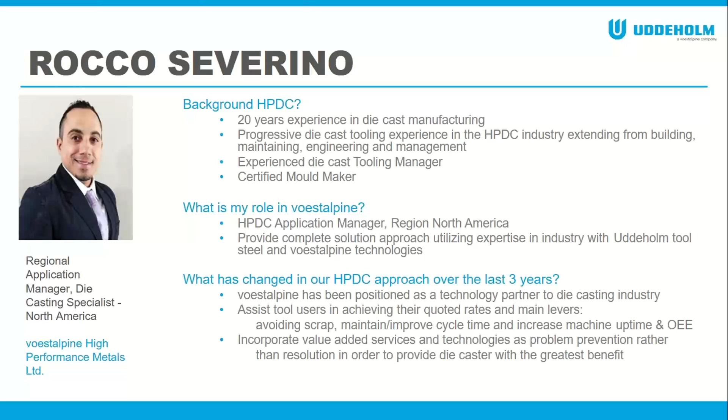Thank you, Ulf, much appreciated. And once again, welcome everyone to today's webinar on the Uddeholm high pressure die casting concept, also known as the voestalpine high performance solution. Hopefully you'll be able to take what you see here today and apply it in your daily business with any improvements that you may require. So with that, we'll get started.

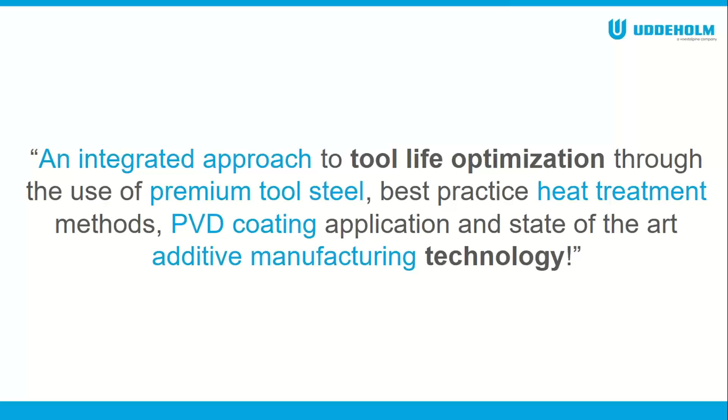What is the Uddeholm high performance solution? It is an integrated approach to tool life optimization through the use of premium tool steel, best practice heat treatment methods, PVD coating application, and additive manufacturing technology.

A little history before we move forward. Uddeholm tool steel, as you may know, is more than 350 years old. It remained that way for quite some time before realizing that tool steel is only as good as its heat treatment. This is where Thermo-Tech heat treatment was born, located in Ontario, Canada. If you've joined the other webinars by our colleagues, you would have had some insight into what Thermo-Tech can offer.

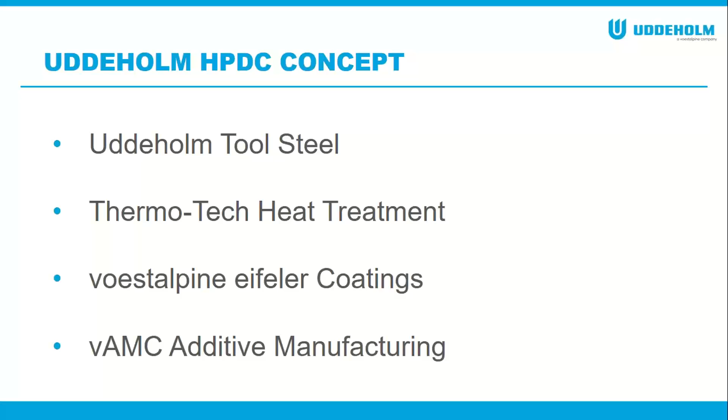It remained this way for many decades, but for the die casting industry, that alone is not enough. Tool steel cannot resolve all issues. Due to that, this is where voestalpine eifeler Coatings was born. This was purchased and added to the portfolio in order to lift the tooling performance and tackle multiple issues at the same time. Then last but not least, you have VAMC, the Additive Manufacturing Center, which complements the other technologies in the system. So what is the system exactly?

It's promoted as a complete solution. By complete solution, we mean being able to mitigate or resolve multiple issues at the same time by using various applications and technologies. This system is comprised of starting with a premium tool steel such as Dievar.

Now the latest Dievar quality standards can meet a minimum of 18.4 foot-pounds of impact toughness. The NADCA requirement, or minimum standard, is 8 foot-pounds. So you can see it's double the NADCA standards, and it really is in a class of its own. For a foundation in your tooling, it is a perfect option. We'll see some case studies further on where we utilize Dievar and PVD coatings as well.

So you couple that with best practice heat treatment, obviously to get the most out of your investment. You want to optimize mechanical and thermal properties of your tool steel.

This is typically left up to the tool maker. So if you're not following through and ensuring that a tool steel like Dievar is heat treated the way it should be, then you could have issues down the line. Dievar, for example, cannot be heat treated like your typical premium H13. It has its own recipe. It should be treated as such.

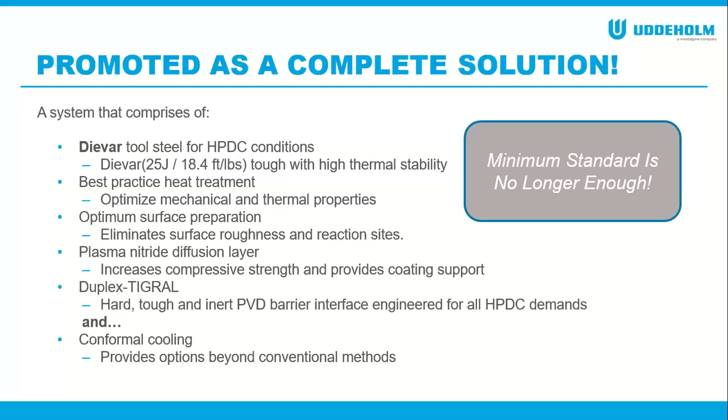Why is this necessary? The die casting landscape is changing, and it keeps evolving, rapidly moving towards stricter quality requirements. Quality has always been a key focus for die casting, but even more so now. More aggressive alloys take a toll on your tooling, resulting in increased heat checking, shorter overall die life, and inefficiencies that are difficult to deal with. So thinking that you could remain with premium H13 and stress tempering—that will no longer be enough in today's die casting.

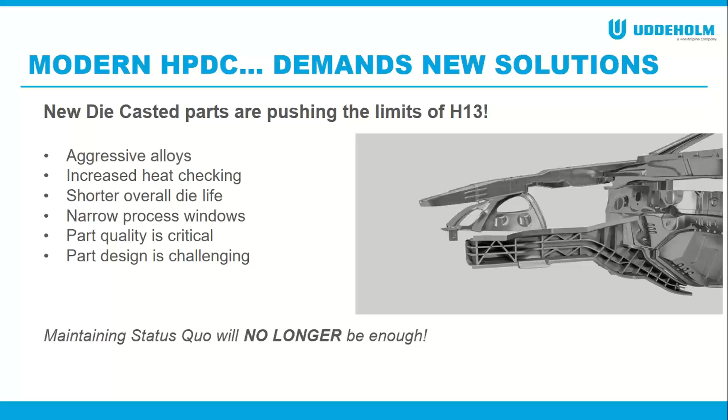So what do these demands mean for a die caster? The part quality challenges faced in die casting on a day-to-day basis are way more than the six shown on this page, for example. But for the six highlighted here, we have either a product or technology that can positively influence any one of these. And it's important to state that with voestalpine alone, you can tackle any one of these issues.

Now we look at the first one, soldering, for example. For the most part, it is difficult to get away from—that's the chemical attack of the aluminum on the die steel, wanting to pull the iron out of the tool steel. So it's unavoidable for the most part.

So when there is soldering, what typically happens in a die casting plant, for those that still use die lube lubricant? You typically want to overspray the tool. So trying to resolve soldering, in turn, you're accelerating heat checking. Now you've made an investment in a premium tool steel such as Dievar, and trying to resolve soldering, you're deteriorating your investment and accelerating heat checking. This is why it's important to have a combination—a combination of Dievar and Duplex-TIGRAL will allow you to reduce your spray, get the most out of your tool steel, and resolve two issues with that combination.

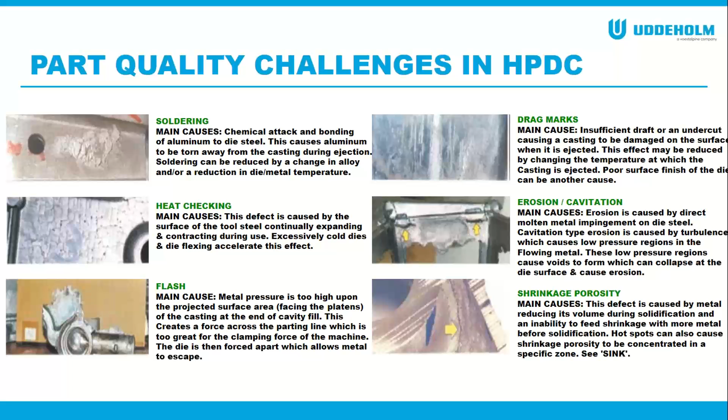So all of the part quality challenges, what does that mean? It results in repetitive failures in the die cast machine, so inefficiencies and start and stoppages of your die cast tool and your die cast cell.

In this example, you see die cast machine number 4. There have been 44 stoppages over a 1-week period. So some of you may think, well, 44 stoppages, I've seen a lot worse than that. But when you think about it, every time the die cast machine starts and stops, and you need to start up again, typically a die caster will scrap 3, 5, 7 or more castings on startup, all depending on the product and the size of the tool, before being able to make production ready parts.

So the downtime now, in turn, promotes a quality problem. So once again, one issue creating another. If you roll that cost over the course of a year, you're looking at millions of dollars just in startup scrap alone, not to mention the toll it's taken on your tooling and or your cell.

So premium tool steel, proper heat treatment, PVD coating, and of course conformal cooling, which is often overlooked, all provide significant opportunity for productivity improvement.

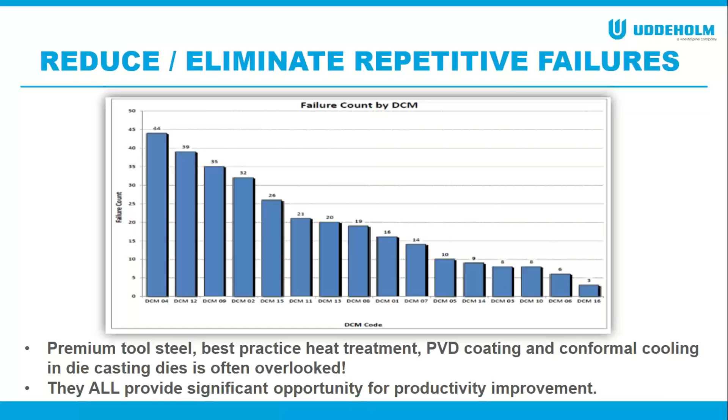So repetitive failures, now you know which die cast machines are the worst offenders, but you cannot resolve that. You do not know the reasons for failure, so you cannot determine root cause and corrective action. So you need to understand that first and foremost.

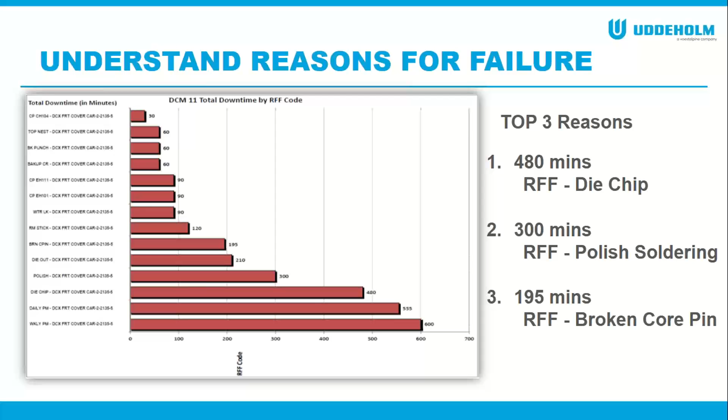So your top three, you now understand and you know, so you can determine the root cause and apply the appropriate corrective action. So now that we know that, tackle one of them: broken core pins.

This is usually the low-hanging fruit for a die caster, relatively low cost, and typically easy to change depending on the design, if quick change designs were added to the tooling.

So in this example, we have an H13 core at 44-46, which typically would need replacement every 4 days. And you can see from the picture, heavy soldering, erosion, and excessive downtime associated with that. So this creates your repetitive failure, your up and down situation, and your unscheduled downtime.

By applying proper surface finish to the core pins and the duplex Tigral PVD, the life was tripled. And what that does, it now allows you to schedule replacement during scheduled time, for example a weekly PM. So now your die cast machine is running when it needs to run, and you're performing maintenance on scheduled time, so you're not affecting your OEE. So this is a perfect start.

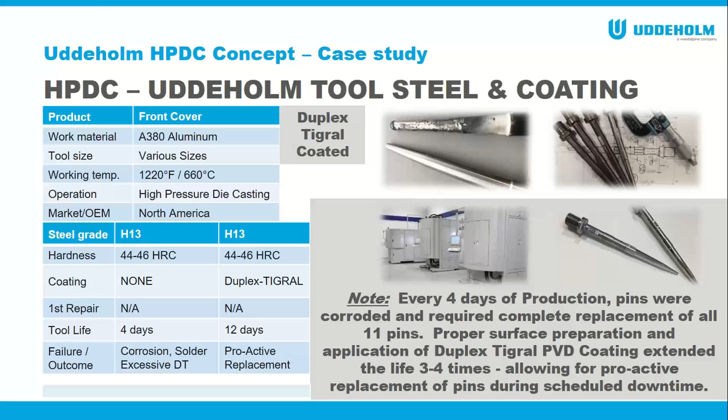So now once you have core pins and you've tried that and you have success, naturally you go on to slightly larger inserts. In this example, we have a gasket groove insert for a front cover tool. You see a little racetrack feature on that tool, as we call it. That is the gasket groove, or creates the gasket groove seal on the front cover, the RTV seal.

This here, and it's important to note, was already converted to Dievar at this point. So the trials were done, the benefits of Dievar were realized. So this insert was no longer being made out of H13, it was made out of Dievar, but now we still have breakage at some section of the groove, on average every 8,000 parts. So you may say, well, we have Dievar, why are we still having breakage?

Back to my point that the tool steel does not resolve every issue. And the moment you tell yourself that and you understand that, then you're not expecting the tool steel to do something that it cannot. So here we then apply, again, the proper surface preparation and a duplex Tigral PVD coating.

And this tool reached 62,000 shots. And I can safely say from past experience, each insert thereafter with this system would last in the range of 50 to 60,000 shots. So it wasn't a one-off.

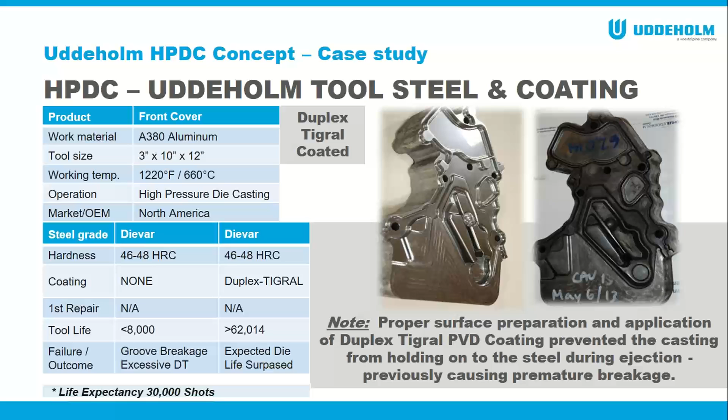During die opening, it would want to pull away and eventually break the section over a certain amount of cycles. Being able to release off the cover half helped tremendously in this case. You still need the substrate to be a premium steel like Dievar to make sure you can last 62,000 cycles and not have a heat checking concern. You may resolve the breakage, but the last thing you want is heat checking in a groove, which is also unacceptable. You see the insert on the right here, which is still in the Ontario, Canada office on display.

So if it works for sub-inserts, why not work for main cavities? Naturally, this was the test and this was the natural progression. Here you have the same front cover tool, but it is the ejector half, opposite of that gasket groove insert that we just reviewed.

Because the larger inserts, and everything is about cost, you have to go through the proper DOE and make one change at a time. Here the main inserts were still Orvar superior at 44-46 with the stress tempering, and they would require repair at 28,000 shots roughly. It was absolutely necessary to repair at that point because of the heat checking, soldering, erosion. At the end of the day, the quality of the castings was not maintained, so you have to swap tools and start fresh. At 28,000 shots, this tool was pulled.

You see a tool life reached of approximately 132,000 shots. There's an asterisk there because you can reach a certain life, barring no catastrophic failure, but how much money and time do you want to invest to reach that life? In this case, to reach 132,000, there was excessive downtime, scrap castings, and repair and maintenance costs associated with that. The overall quoted die life was not even reached. So you can imagine, if that money was invested up front, it would be better served.

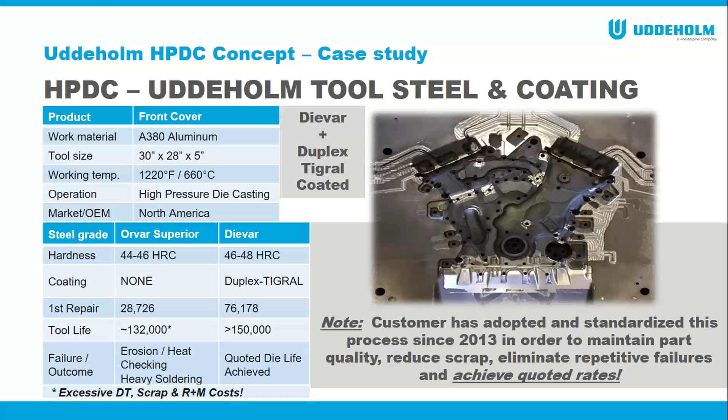So the final complement to the system, conformal cooling. Here we have a different product, not the front cover product — it's a clutch housing, in this case a multi-plate tool center fill. With a clutch housing, if you're familiar with this product, you have thin wall sections, just the nature of the design, and right in the center you're dealing with a thick section. So you need to feed that thick section, but with any thick section in a casting, you also need proper cooling in order to have the right solidification time. So that becomes very challenging.

In this example, with a premium H13 sprue, which fills the casting, at 44-46 Rockwell with the duplex Tigral coating — again, I'm showing you examples that you need the right solution for the problem. There was still heavy soldering and, of course, shrinkage porosity at the gate where the sprue and spreader meet, at the last area to solidify.

With that shrinkage porosity, the scrap was well over 20%, at one time close to 30%. You could just imagine having to backfill and remake those castings, and the whole headache all the way down the line. Tool life was respectable, but tool life is irrelevant if you're not making good castings.

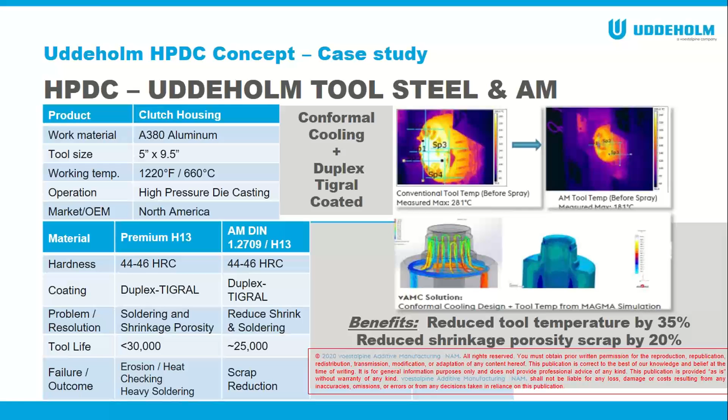FEA analysis needs to be performed. Do you have the cooling in the right place? So on and so forth. This was a tremendous improvement and a nice complement to the system.

So now back to a die casting plant and scheduling. A tooling engineer or tooling supervisor manager needs to schedule preventative maintenance. With your basic tooling, let's call it your premium H13 and stress tempering, a typical service regimen would be every 20 to 30,000 shots.

Every tool is different depending on the product and the size of the tool. The maintenance schedule for a transmission case will be different than one of a front cover, as this example shows. But let's just say for this it's every 20 to 30,000 shots, and it's absolutely necessary to have a rotation at that interval.

Excessive heat checking, frequent polishing, welding, and the biggest waste of all, extra operator rework. You quote a die cast machine to run with one operator, and now you need to add a body just to bring castings into specification. That is huge waste, and usually the last straw before having a die pulled for another one.

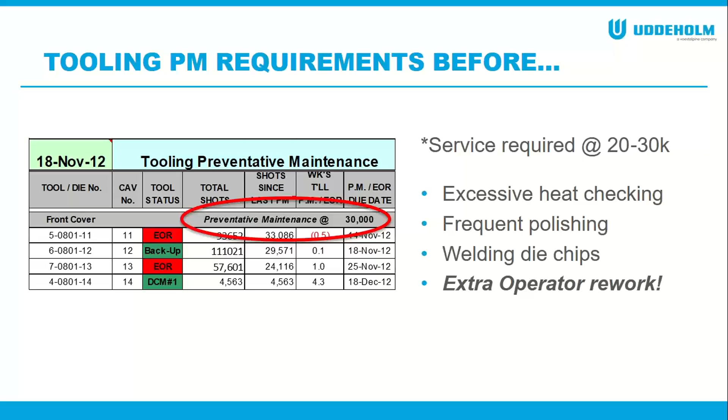With our system, or with the Uddeholm system, you can safely extend that interval to 60,000 shots. You saw that one case study was beyond 60,000, but you also want to have a schedule that allows you to make a change before going beyond. So 60,000 is a safe number, and with that you are skipping one service essentially.

So not only the money saved with one service, but everything associated with that, the schedule, the setup time, the scheduling, the rotation, having more dies ready in order to rotate. The savings goes beyond just the maintenance interval or the maintenance cost.

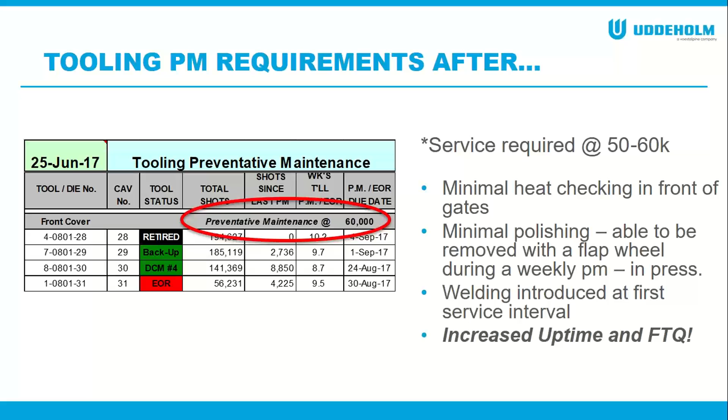With this, you have minimal heat checking in front of the gates, minimal polishing, which can be addressed during a weekly PM with just a flap wheel. You have the PVD film protecting that die steel, which allows the soldering, if there is any, to be easily removed. Welding is introduced at the first service interval. And at the end of the day, increased uptime and first-time quality for you, the die caster.

All of this translates into an improvement in overall equipment effectiveness, OEE, as everyone calls it in the plant on a day-to-day basis. Many meetings around just OEE in general. So what is the calculation for OEE? You have availability times performance times quality. This is the calculation to get your overall equipment effectiveness and understand it.

So what is availability? If you're scheduled to run 24 hours, the thought is that you are making good parts for 24 hours and you are running. Any time that you are down is essentially downtime, and that is lost time. As I explained earlier, every time you have downtime, now you have startup scrap. So one issue creates another. Two out of the three factors for OEE is directly connected to your downtime.

So you could see how addressing your repetitive failures, understanding your reasons for failure, is critical. In the center you have performance, that is your cycle time. You're quoted to run at 60 seconds. If you're running at 80 seconds, that is 20 seconds of speed loss.

So conformal cooling can help get the solidification where you need it, ultimately reduce your spray, and savings in cycle time on both fronts because of it. All of this translates, once again, into increased tool life, eliminating your repetitive failures, higher productivity, improved part quality, and at the end of the day, reduced per part cost for the die caster.

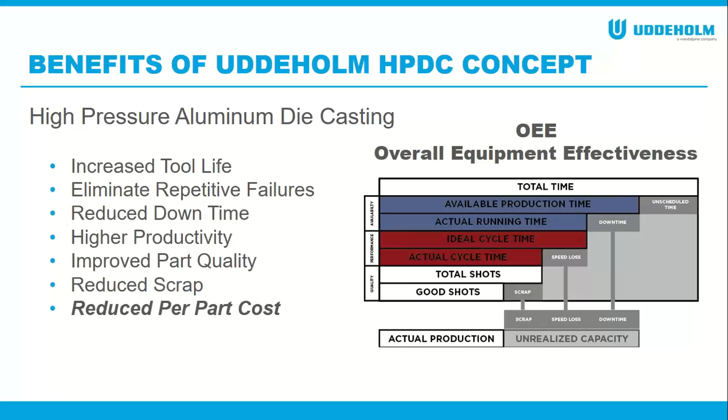First time quality. I want to put some emphasis on first time quality because the die caster sells castings, not dies. First time quality is a lean metric, essentially manufacturing parts correctly the first time without the need for inspection, rework, or replacement, and all the non-value added cost associated with that.

What does that mean? Quality is built in. It's built into the casting, and in order for it to be built into the casting, quality needs to be built into the tooling up front. Make your investment up front, and everything downstream will be taken care of. It makes your life much easier.

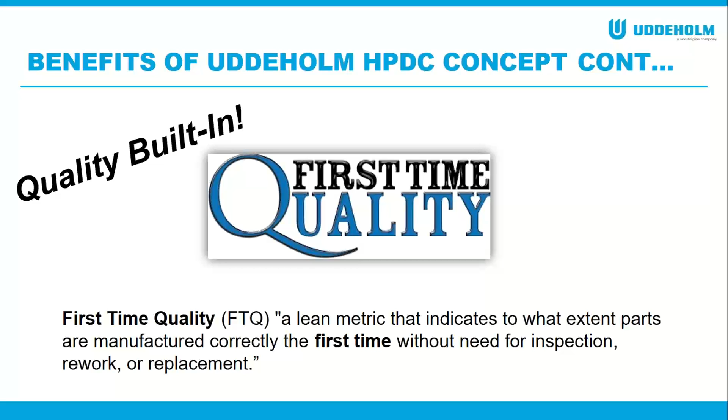This is a mindset that Uddeholm and Voestalpine has embraced. We believe in quality being built into the tooling. That is why premium grades such as Dievar exist, and why a premium coating such as Duplex Tigral exists, in order to allow you to have the quality built into your tooling.

What does this mean for you, the die caster? What are the top 3 benefits of this system? Consistency, reliability, and accountability. These are the top 3 benefits, and they cannot be more important for you. Consistency - if each tool is built with Uddeholm material and Voestalpine value-added technologies, this will result in repeatable performance throughout all cavities, essentially eliminating variables.

Personally, from experience, there's nothing worse than having multiple tools for one product built differently - for example, one with Uddeholm tool steel, one with another, one with coating, one with stress temper. When there is an issue with that tool or die cast cell, trying to pinpoint the root cause can be daunting and sometimes impossible. So you're basically guessing at best at what the reason could be.

Since we adopted the consistency of having each tool built the same, that allowed us to focus on a different avenue, whether it be the process or the machine itself. You have one constant that you can deal with. That is why it's important.